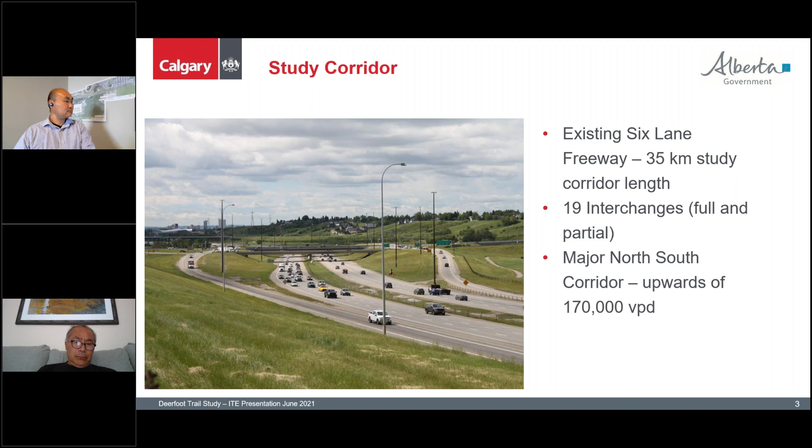The principal role of the Deerfoot Trail within the city is to provide an efficient, reliable, and safe connection for motor vehicle traffic and goods movement within, to, and from the city. The purpose of the study was to review and develop short, mid, and long-term recommendations to enhance safety and mobility for all users, and improve traffic operation throughout the corridor and adjacent network over the next 30 years.

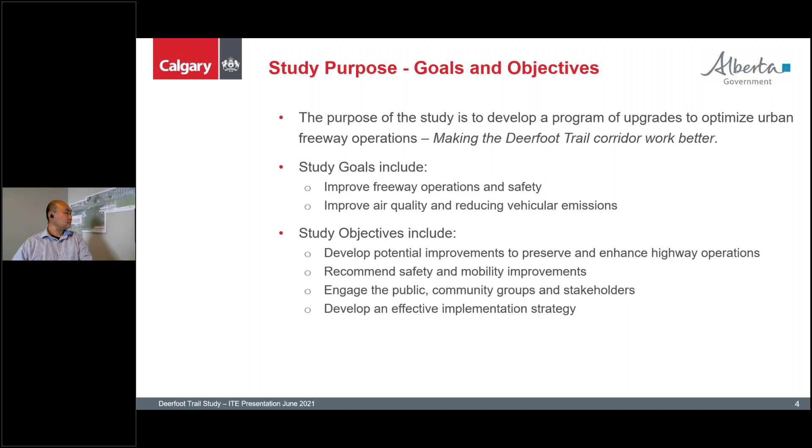Thanks, Jeffrey. So I'm going to go through the study process. In this big study, we had several key steps. The first step was putting together an existing and historical context report, which was a big data collection exercise documenting what's out there. Then we went through extensive work on the problem definition report.

That involved a lot of analysis of existing and future conditions. We developed an evaluation framework for assessing the concepts near the end of the study, and developed improvement options, which was a major undertaking. Then we went through option evaluation and recommendations, and given the length of the corridor, there were quite a few recommendations throughout.

And then there was the final step, which was putting together the final report and an online public information session.

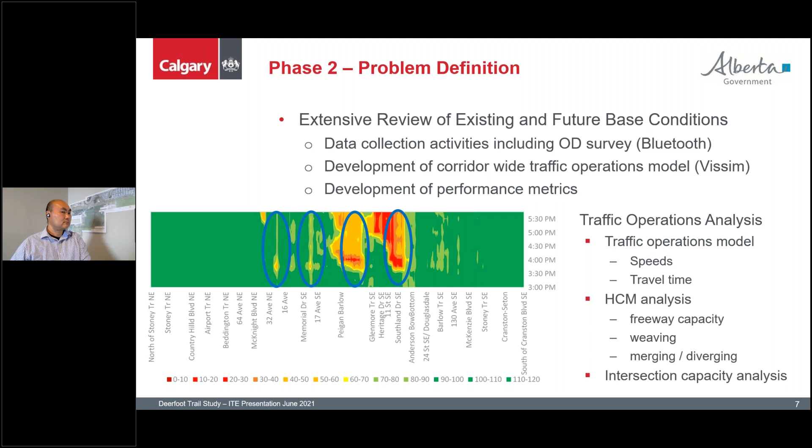We developed a corridor-wide traffic operations model, used to assess traffic operations on the corridor, especially into the future. We used a lot of existing data for existing conditions, and developed a series of performance metrics so we could tell the story of what's actually happening on the corridor.

Through the analysis performed using the operations model, we showed the speeds on the corridor and travel time. That graphic shows the speeds in the corridor and where we're having problems and breakdowns, with time on the y-axis and distance on the x-axis.

Then we did a bunch of highway capacity manual analysis as well. Here we were trying to pinpoint the actual causation of some of the operational issues out there, related to freeway capacity, weaving, merging and diverging.

We also did some intersection capacity analysis at the ramp terminals and the adjacent intersections just off the corridor, because a lot of those, as many of you know, are driving some of the issues along the corridor just off the ramp terminals.

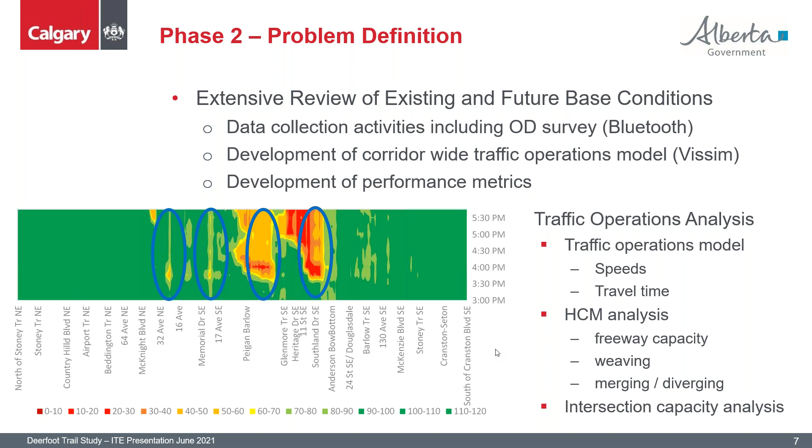We also did a safety analysis of the corridor. We looked at the crash frequency, crash rate, and critical rate index, and then crash severity. Through that, we identified the potential high crash locations and high crash interchanges.

This was a difficult undertaking to put into perspective, because there weren't many comparable corridors in the province to rate things against. So when we looked at the high crash locations and interchanges, because we had such a long corridor, we rated things within the corridor itself—putting things in a priority and identifying high crash locations and interchanges relative to the other interchanges from end to end.

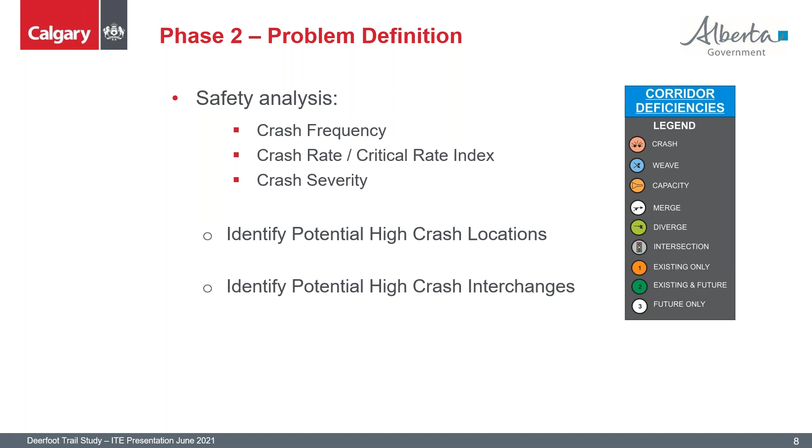This gives a summary of all the issues along the corridor, so there was no shortage of those. We presented these things graphically to show both safety issues, merging, diverging, capacity issues, and intersection operational issues. This gives a snapshot, showing things both in the existing conditions and in the future conditions.

One of the key things I'll put a little sidebar in here: through the Bluetooth OD survey and a lot of the modeling done by the city's team, one of the key findings from this problem definition analysis was the OD patterns, especially crossing the river. What we saw is that there's a lot of traffic using the river crossings at Ivor Strong Bridge and at Glenmore Trail Bridge that is primarily east-west traffic, but to cross the river, they're using the north-south corridor. So we see traffic getting on at 24th Street or at Barlow, crossing the river, and then getting off at Anderson, Bow Bottom, or Southland. We see that east-west traffic pattern causing a lot of problems.

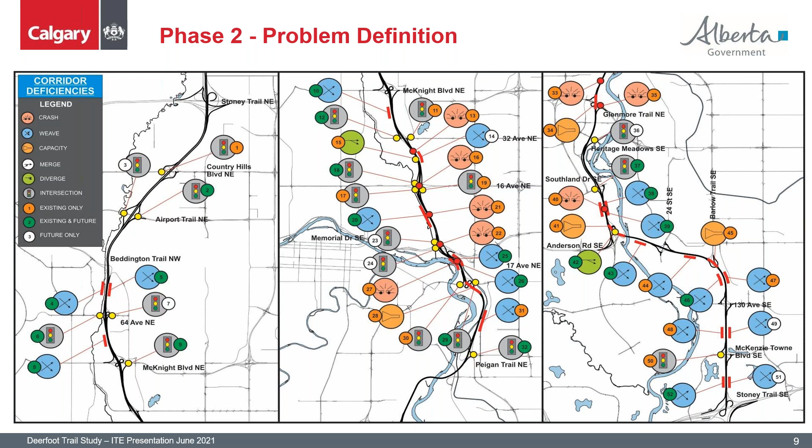That drove some of the options we generated for the future, both at the northern part of the corridor, or the middle part at the Glenmore Trail Bridge, where some options looked at network connections, and similarly down at Anderson Bow Bottom, to look at network connections there as well to try and alleviate that east-west traffic using the north-south corridor.

So the option generation process - we had quite an extensive process that we went through. We divided it into three steps: strategy assessment, concept screening, and option evaluation. This kind of long-winded process for option generation was necessary because we ended up having a significant amount of ideas, or traffic management type considerations, that we wanted to look at on this corridor.

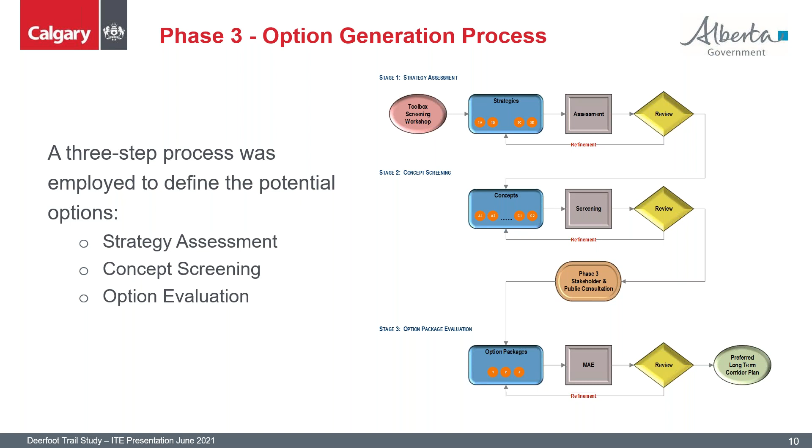We had this toolbox of traffic management ideas. When we started the study, we wanted to explore everything - even at the very beginning we were looking at tolls, but that was taken away. So we were left with almost 70 elements across 6 categories in our toolbox, looking at everything from traffic mobility related traffic management tools, demand management ideas such as HOV lanes, mode shift ideas, improving safety - getting down to a little bit of detail. We definitely had technology application, so there's a layer of ITS type improvements, and then we had general capacity and geometry improvements.

Part of that whole process, as we get into the strategies, is we went through a toolbox screening workshop, and we looked at all those problems in the corridor. Through involvement from the city, Alberta Transportation, and our project team, we narrowed that 70 elements down to 41 - still a pretty big list.

The next step was to look at the strategies themselves, definitely at a high level, and we came up with 5 themes coming out of that workshop. Through those 5 themes we had 13 strategies, different ideas within each theme. We had travel demand management ideas - this is where we looked at HOV lanes. We had network improvement, isolating improvements across the corridor to address the issue we talked about with origins and destinations that were more east-west orientated.

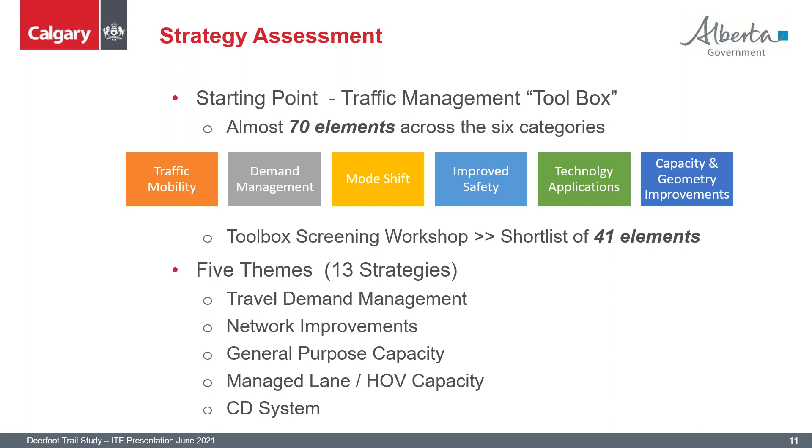Through that strategy assessment, the analysis methodology was more or less focused on some key criteria, all related to the ability of the analysis tool. This was all done at a high level using the city's model, and we pulled out information related to network travel time, traffic volumes or usage - especially when looking at new links as network elements crossing the corridor - network travel, total vehicle kilometers traveled in the city, volume capacity ratios on the corridor, route travel times, and because so much of the corridor is adjacent to the Green Line, we also looked at whether we were influencing or impacting ridership on the Green Line.

The strategies were developed with the level of detail commensurate with the analysis tool, and we worked closely with the city's modeling team on this. We'd sketch up the ideas, they'd be coded, we'd review those, and if everything was all A-OK, the city would model those for us. All the outputs were post-processed by our team in a systematic process to populate those assessment criteria, and through that high-level analysis we were able to remove strategies that weren't addressing the objectives we were trying to achieve.

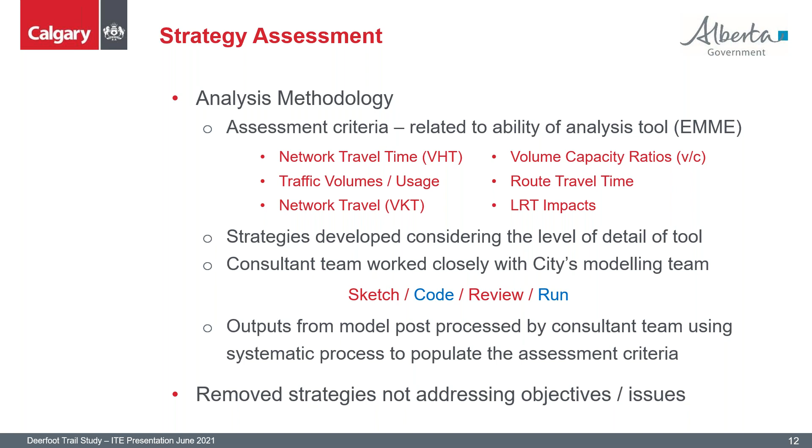Next slide. That led us to the next step, the concept screening. Now we're adding a bit more detail to the options or concepts, taking those ideas or findings from the strategies. We came up with 3 themes, and within those 3 themes we had 8 concepts, built around HOV capacity, GP capacity, and a series of collector distributor lanes along the corridor.

As I mentioned, the strategies were pretty high level. Now we're adding a little bit of detail into these concepts to start targeting some of those issues we identified in the problem definition, and coming up with some focused mitigation measures. So these concepts definitely had more detail. So when we went to the analysis - go to the next slide.

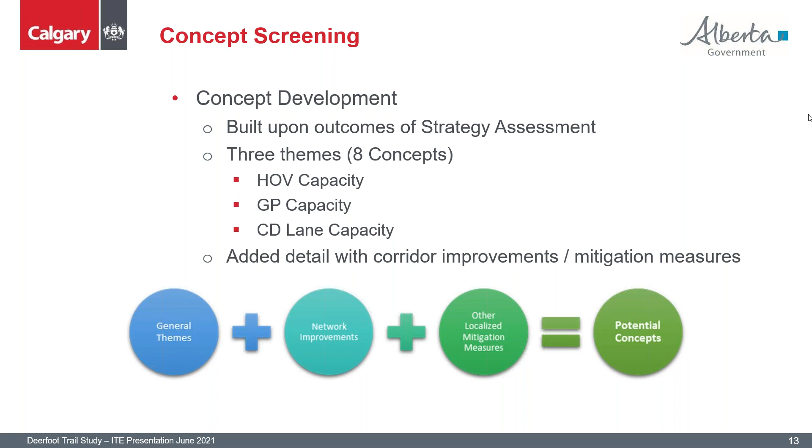We used the same tool for the main analysis, but we added extra criteria to reflect feasibility. Now we're no longer working in a virtual world - we're starting to look at some practicality of these concepts, looking at costs, property impacts, and impacts to sensitive lands or environmental impacts. We looked at all those together with the same analysis criteria we were using with the model, and the same methodology. Through that, this is where we narrowed things down to the 3 option packages that we went into the multiple account evaluation. Next slide.

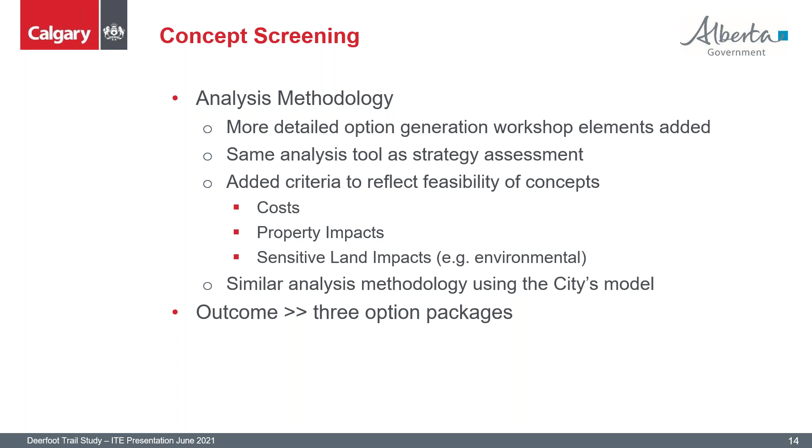So the option packages, we broke things down. Now we could get into much more detail. Within the option packages we had 3 layers. So we had the traffic infrastructure layer - this is really looking at physical improvements for traffic.

We are looking primarily at increasing highway capacity, adding a general purpose lane or HOV lane in each direction. For interchange improvements, we were looking at various changes at the interchanges to address traffic operational issues or safety issues, getting much more detailed into what each of those interchanges potentially look like in terms of connections. We also have some network improvements, such as new connections across the corridor or adjacent to the corridor.

The next layer in here is active transportation. We looked at a number of potential improvements in the corridor, primarily across the corridor, to improve active transportation. A review was done to look at all those gaps crossing the corridor, and there was no shortage of those either. In the corridor there are a lot of structures that don't even have sidewalks on them, and a lot of locations where there are some pedestrian facilities, but not meeting current standards - quite narrow, not dealing with either cyclists or pedestrians very well.

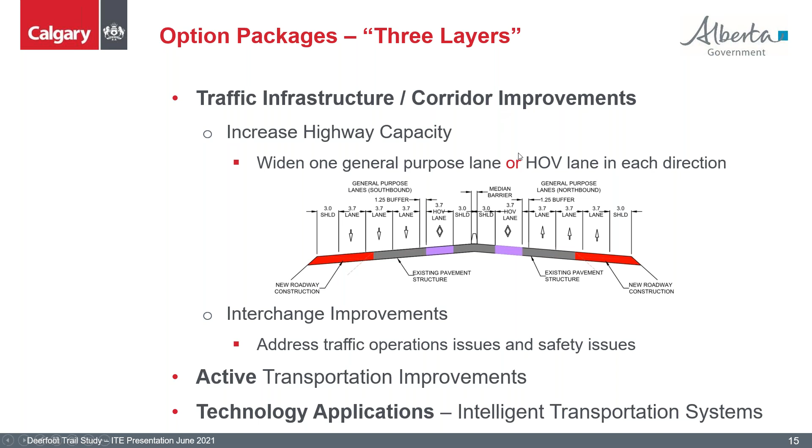This is a snapshot of the extent of the corridor when we were looking at the capacity improvements. For the HOV extents, we were looking at from Airport Trail to Barlow Trail. Through the strategy assessment and concept analysis, we concluded that we didn't need to look at much more capacity beyond Airport Trail or south of Barlow Trail. We looked at whether that extra capacity should be provided through an HOV lane or a GP lane, and as most of you probably know, we did recommend going with an HOV lane as the primary means of adding capacity to the corridor.

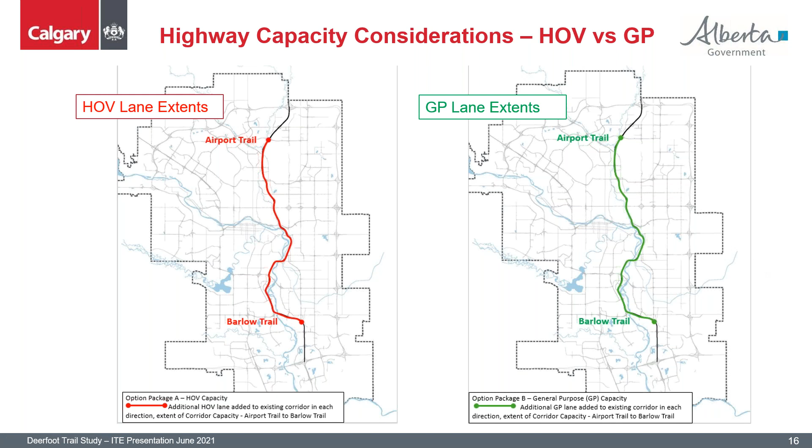So then we get into the last phase, the option package evaluation. We have those 3 option packages that we've come up with, largely driven by a couple key areas within the corridor: down at the Anderson Bow Bottom area and down in the 17th Avenue Memorial Drive area. Those concepts really drove the option packages, and then we added other common options to those packages. Then we went through a multiple account evaluation.

This is where we got quite detailed. We had a financial account where we looked at capital costs and property costs, and the customer service account, primarily driven by travel time savings. This is where we used our VISSIM traffic operations model, and we assessed in detail all the options in the corridor out to 2048.

We looked at improvements in road safety, pedestrian and cycling accommodation, and transit service accommodation, both within the corridor and across.

For social community, we looked at that specifically from property impacts, but also noise and visual impacts. We definitely got feedback from our stakeholder and public engagement, especially in areas around Barlow Trail south of Memorial, where some improvements would impact people's viewpoints over the city, where we could be widening out Barlow Trail. We looked at mitigation measures coming back from that feedback.

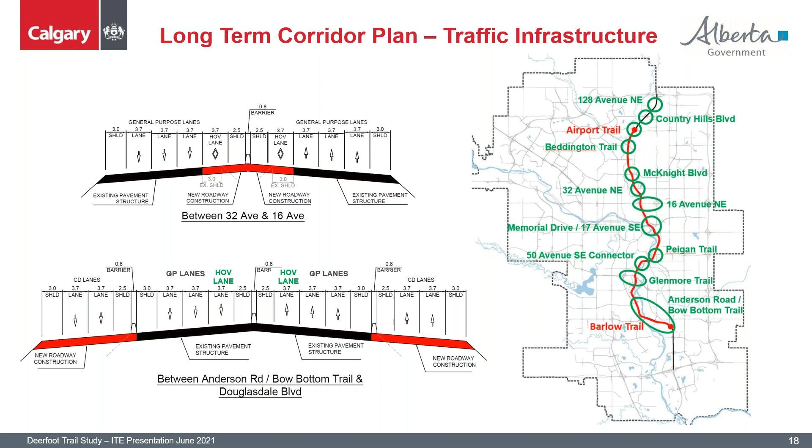The preferred long-term plan has the least property impacts and the least environmental impacts compared to other alternatives. I will quickly go through several improvement plans at some key locations. Next slide, please.

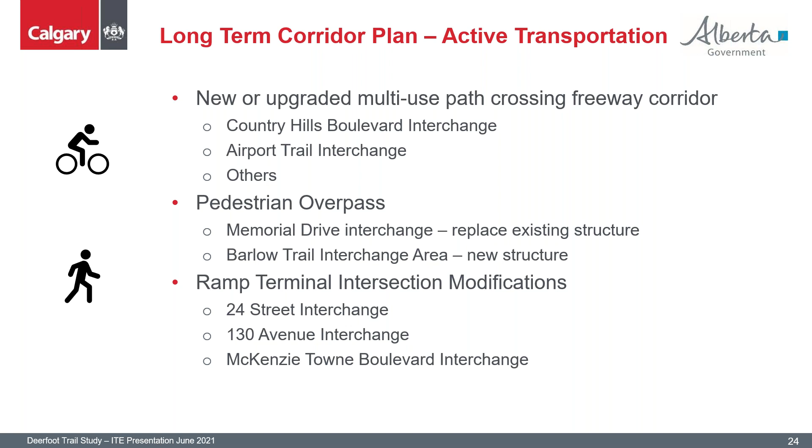The third level we consider is ITS application. In the short term, we recommended continuing to use advanced traveler information systems and improve the incident management system. In the midterm, we recommended a queue warning system, and for the long term, we recommended lane management and speed harmonization.

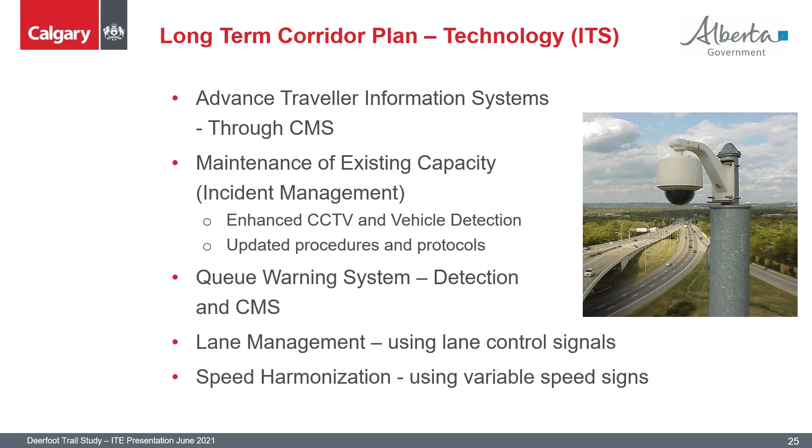I believe this is pretty much about that. Next one. This wraps up the whole presentation. We are happy to take your questions. Thank you.

Thank you, Jeffrey and Ken. Any questions, please use your chat functions. Basically, there's one question: Based on the model, how significant was the impact of additional general purpose HOV lane on the transit network?

Actually, we found that the impacts were not that significant. So when we started looking between the options, we didn't see a whole reduction, that much of a reduction in ridership. There was a reduction in ridership a little bit, but it wasn't that significant. So that criteria became kind of a bit of a wash through the comparison.

Great. Just a simple question. It says that in this technology slide, there's an acronym, CMS. Did you define that? CMS, that's changeable message signs, or it could be dynamic message signs, just depending on what's driving that. So just definitely having some electronic boards out there to disseminate information to drivers.

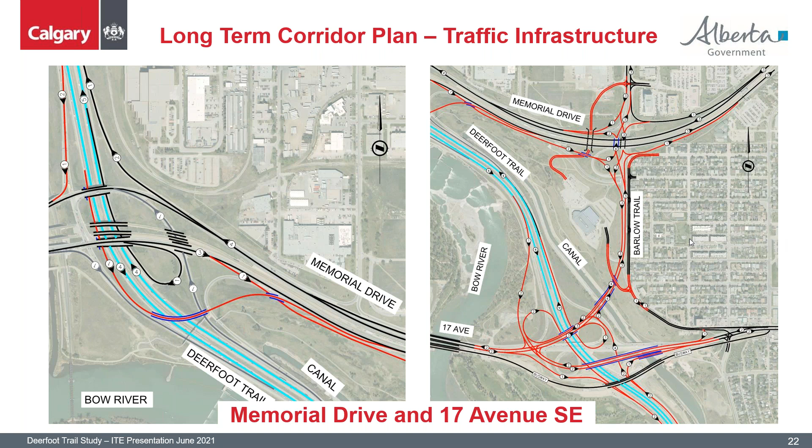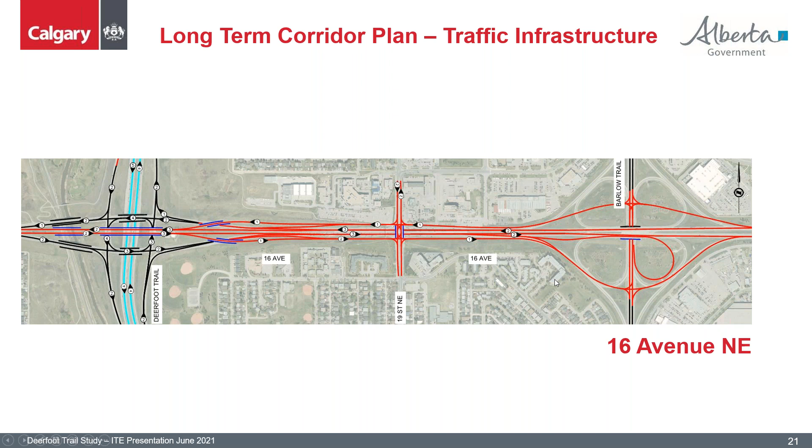We did make a few changes to the configuration of Peigan Trail to take the jelly bean loop out and put it back to a directional ramp, because we are widening the highway to accept that ramp. So that was considered in the concepts, but we retained the intersection of Barlow and Peigan. We were looking at controlling or metering traffic onto the highway. Opening up those valves at those intersections would only put more traffic onto the corridor that can't be handled, because we're only really looking at one lane expansion. So we didn't look at any significant changes to the Barlow Peigan Trail interchange other than the ramp access from Peigan Trail onto Deerfoot Trail.

Next question: can there be cost, capacity, or safety benefits of reducing the maximum speed to 90 or 80 for current and future years?

We did not consider that. We kept the posted speed or design speeds the same. That's definitely something Alberta Transportation could look at if there are advantages, but it was not explored in this study.

Thank you. Are there any more questions? Oops, sorry, go ahead Jeff.

Today the majority of Deerfoot Trail's posted speed is 100 km per hour. North of Peigan Trail, I believe it's 110. So when we started the project, at the very beginning to define the role and function of Deerfoot Trail, we had a workshop with Alberta Transportation, and we decided on no speed reduction, or said another way, AT would like to keep the existing posted speed.

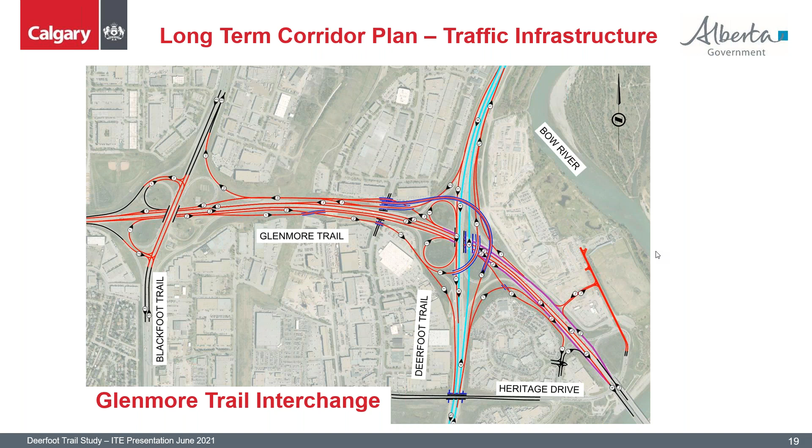That's a tough one. We didn't recommend a strict implementation order, but we did break things into phases - short, mid, and long term, with short term being the next 10 years. 17th Avenue, Glenmore Trail, Anderson, Bow Bottom, and 16th Avenue are the locations we recommended for improvement in the short term. This whole corridor is huge, so the capital cost estimate was huge too - even just the short-term phase is still over 1 billion dollars. We recommended the immediate locations needing improvement for the coming P3 project, but based on available funding, they may only be able to do some, not all, of our phase 1 short-term recommendations. Hope that answers your question.

Thanks. Any more questions or comments?

Question from David. Thanks for presenting. In the concepts, it looks like Glenmore Trail had 2 core lanes under Deerfoot, and Deerfoot Trail had 2 core lanes plus HOV across the Ivor Strong, just south of Anderson. Can you describe some of the factors or benefits - geometric, traffic, or other - that led to the core lane reductions through these sections?